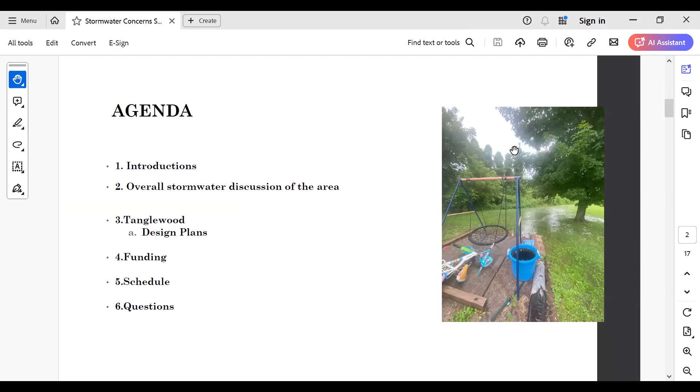So to understand, this is not only a Tanglewood problem, this is an overall problem in all the area, in all these places. I want to show you that, for example, all the water that came from the mountain and came channeling from the I-89, sorry, came to the Sash and then to Gracebrook and then crossed to the Sash and ended up in Tanglewood - all the water that happened last year.

All the yellow arrows show the problems also around the area we're having. So this is showing that also the Sash has problems with the covers, has old covers, and VTrans is gonna fix that in the coming years.

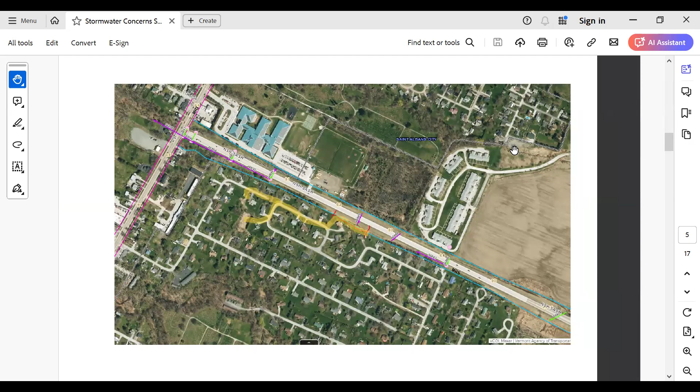So that's the main problem, but we want to know solutions. The solution is we want to keep that water from all coming to the Tanglewood, because the new gravel wetland is not gonna have the capacity to carry all the water. So we're gonna do the west basin and the east basin and the north, as shown here.

So this is the intersection right here. This is exit 19 on 89. This is the Sash going west. This is Route 7, okay? Across from the complex, which is right here, is the west basin and east basin. They're both on the northerly side of the Sash, the St. Albans State Highway.

So all these projects are to keep that water out and fix all the problems we have over there, because through the years of bad development, no maintenance, no drainage - well, we want to start to fix all of that. The next couple of years, with VTrans and with these two committee projects, we want to channel all of that, plus the new wetland in Tanglewood.

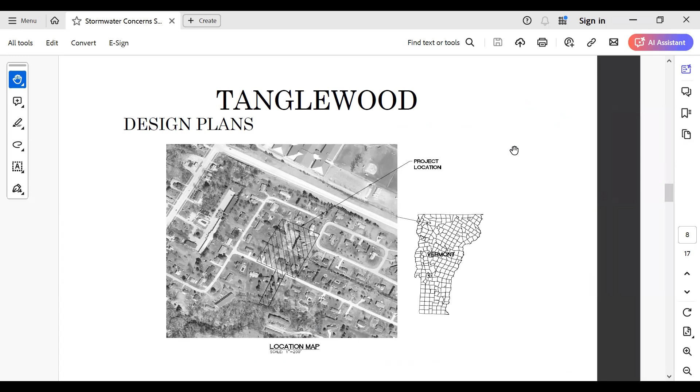So currently there's an existing gravel wetland in Tanglewood. This is Tanglewood over here, Potter is over here, and Meadowbrook is right here. So this is the corner of Tanglewood - there's an existing practice, you probably can't really see it, it's all grown up back there, a lot of higher tree shrubbery. This is sort of wetlandish right now.

The idea with this project is to utilize that existing practice. The design and the requirements are a little bit different from when this was put in. What happens with this proposed practice - we bring flow into the practice from this side, right off Tanglewood, and we also bring flow in from the practice sort of cross lots between Tanglewood and Meadowbrook. So there are two entry points to the gravel wetland.

In order to treat water quality volume, that first flush, the one-inch storm, we have a forebay here, which is sort of like a sedimentation basin. Flow comes in, sits in that basin, and then spills over into the larger portion of the gravel wetland. A gravel wetland is a system where you can attenuate flow but also treat flow. It's a two-part system, and you'll see some details here in a second.

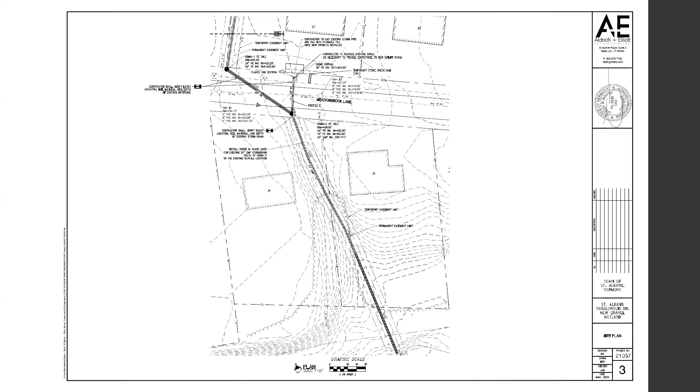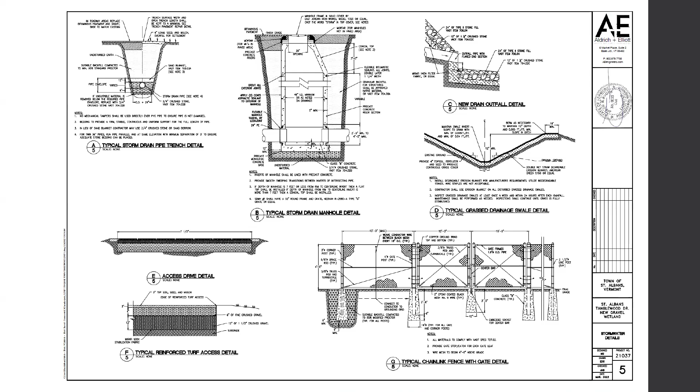During a peak event, if you go down, Julia, sorry, two more again. So your inlets, I don't quite see them here. But no, you can go back up - that one you just had, yep. I believe the inlets are up around this area.

So you've got some freeboard within the practice. And then backing up, we've looked at surcharging, and surcharging happens basically in the inlets to the practice, but it kind of backs up in those swales. And that's pretty much it.

Plus, to another part of the agreement - the MOU and stuff we're working through - is that we're going to maintain it. So like right now, it's underperforming across the board, but for us to maintain it, it's going to help, you know.

So I just want to talk to your point a little bit more about volumes. I don't have specific volumes off the top of my head, but I can tell you there's an elevation in here which we call CPV, channel protection volume, and that's just under a 3-inch storm.

That volume right there is just under a 3-inch storm, and that's entirely contained within the gravel wetland, below where the inlets come into the practice. That's a big storm, a very big storm. So there's volume here, you have attenuation, you have volume. Now, we can't control everything, there's a limit to what you can control for storms, but this is a large amount that you can capture in this practice.

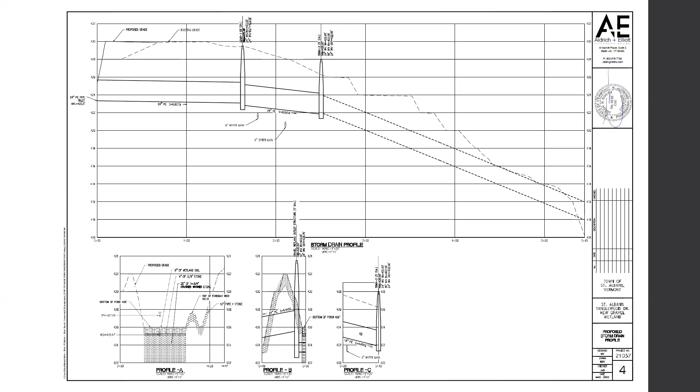So, yes, as for the schedule, as we talked about, we need to work a little bit on some agreements with a few houses, but that's mostly almost done. We need to talk with the town attorney, and we hope to get all that ready and start the bid in June or July to start construction of this wetland. So hopefully, fingers crossed, we'll have all that agreement in place. As Sean was talking about, we also want to maintain the wetland and the HOA mowing and all the stuff, but mostly we want to maintain and operate the wetland. So that's another thing.

That's it, I think. Any questions?

Back to the maintenance part, so folks understand the breakdown more. Yes, we're going to be responsible for mowing and the basic stuff on the outside of the pond. The pond itself is beyond our capabilities. We have an understanding with the town, and Sean, would you put this in your email too, please? Yes, it'll certainly be in the MOU. All this will be in the MOU, and the agreement, all going in.

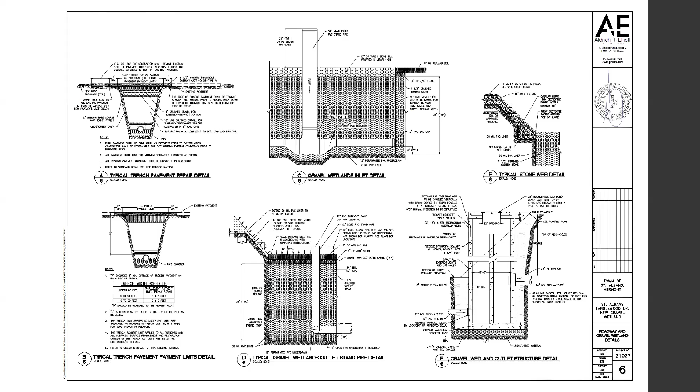We're trying to utilize as much of the existing footprint as we can. Obviously we've got to excavate a little bit deeper, but we're trying to stay within that footprint. To answer your question, it does expand - it is a bit larger in overall footprint than the original.

Sorry, I jumped into this - my name's Dan Burleson, I'm actually on Potter Avenue. My basement's flooding as much as just about anybody's, and so are both my neighbors on both sides of me.

My backyard is facing the retention pond. I'm on the west side of the retention pond. And there used to be a ditch and a culvert running across, up towards that. And over the years, that ditch has completely overgrown now.

My bigger concern now is if the retention pond gets bigger, because the ditch, I believe, runs right on the backside of that retention pond. From here down along the side - that's staying, that's slow flow. There is no ditch there, but it's very wet. You just don't walk back there - it's overgrown.

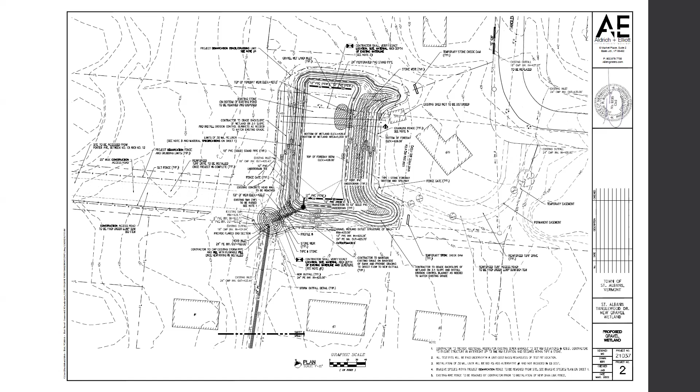What you're referring to is there's a lot of flow that comes down within the Tanglewood right of way ditching system, along the edge of the road here, and goes straight this way, as opposed to turning the corner and coming this way. So part of this is to long-term capture this flow.

There is ditching there, yes, but I don't know if there was, it looks like there might have been a path there, or a road, a connector. They were connected, drive up Potter's Ave, and all the way around, all the way around the cul-de-sac. Yeah, that's what it looks like.

So they locked it off, made it a dead end. That needs to be reworked so that flow doesn't go that way, because what's happening is it jumps and some of it goes this way, and then some of it does get around and comes into here. But essentially for this to work, it'll still work, and for this to alleviate, this has to be connected around that one.

The ditches just aren't deep enough anymore. After 20 years of sediment, the ditches are getting shallower.

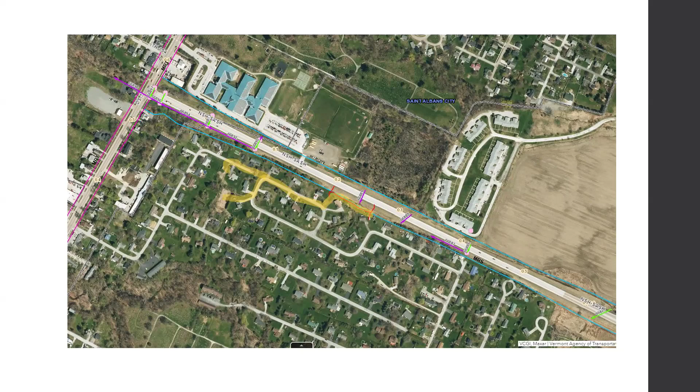They were talking about moving that south ramp further back, but I can't see what difference that makes. They're doing the right turn only this year - there's digging involved, is what I'm proposing. If we're going to do all this and find out in the end after they do all that...

It's not that, I would just rather not do it this way. I'm all for it if y'all think so. I talked to them - alright, we'll do this and figure it out, but they gave us the grant too, so they know what's within us.

That's why we applied for the grant - we're not waiting for 2026 to start that. The grant takes 6 months, then that means next year to study it, and then next. So that's why we're doing it now - it's a little bit bare minimum to show them we're taking it seriously.